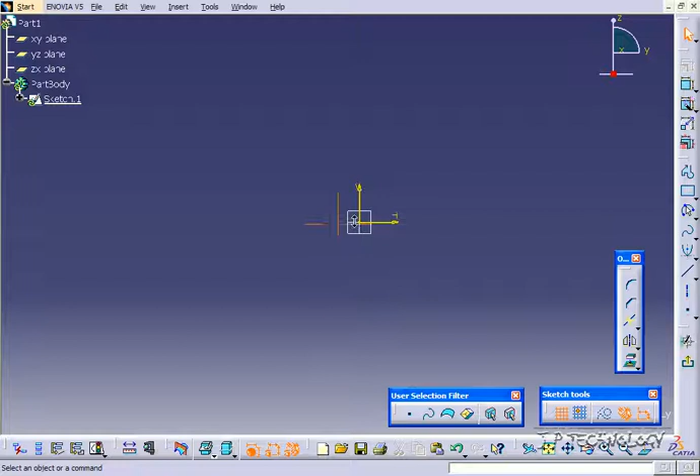So in the last tutorial, I showed you the definition of the Spline sketch feature. So now that you kind of have an understanding of what a spline is actually doing mathematically, now I'm going to show you how to manipulate it within CATIA v5. To find the spline tool, it's Insert, Profile, Spline, and you can choose the spline, or it's on the toolbar on the side right here.

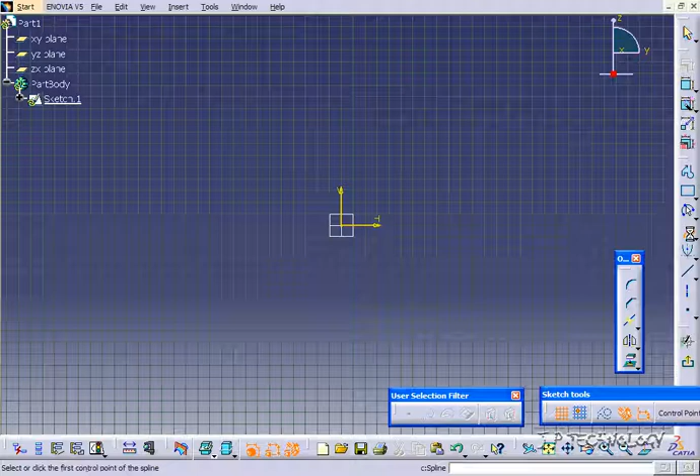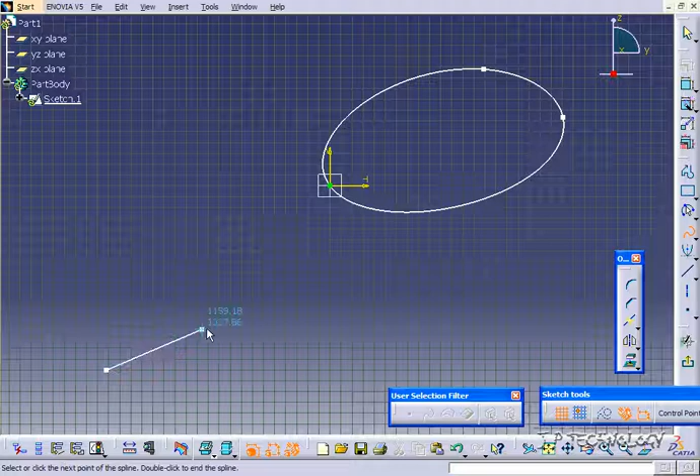So let's click Spline, and let's just start drawing one out. Now, in CATIA, say I've drawn this spline, and now I want to close it. All you have to do is right-click and click Close Spline, and it's going to close your spline profile. Now say you don't want to close the profile, what you have to do is start drawing it out, and then once you've got your profile done, double click Escape, and it'll leave your profile alone.

Now again, like the other sketches, you're able to manually adjust, so you can click on the spline and move it in any position, but say you actually want to change how it looks, you'd have to click a point, drag, and move it around. This is especially useful with the spline, because the spline has a very organic feel and look when you're playing with it.

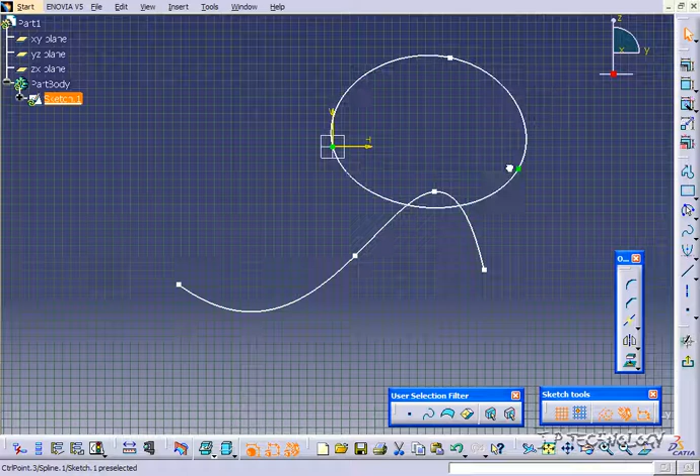It allows you to really massage your spline and give it the look that you want. So you're able to do it to just the profile, or you can do it to a complete sketch such as this. Now, before I showed you that the spline tool is very mathematical, and that each of these sections is a different function, you're also able to add dimensions and constraints.

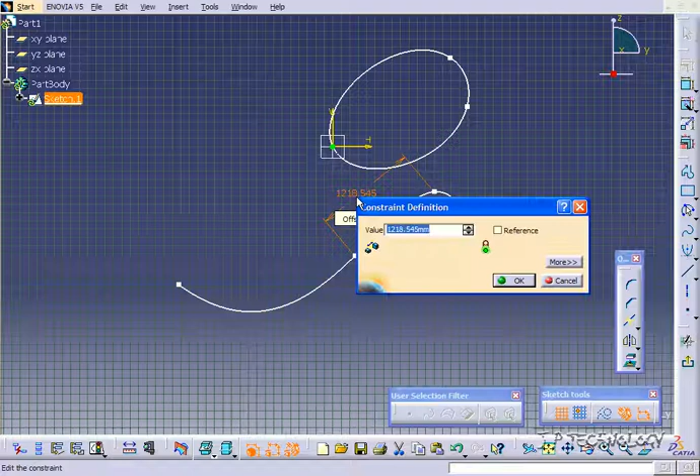So let's click Constrain, and let's click this point here and this point here, and we'll change the distances. So let's make this 2,000, or sorry, that was 200. Let's make it 2,000. And you can see that we can add dimensions and constrain where these points are relative to one another. So we'll make another one there, and we'll make these 1,000 apart.

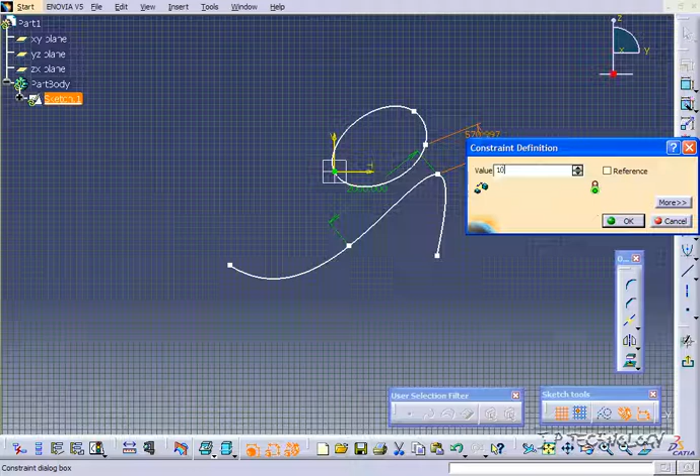So by adding these dimensions, you're actually able to really hone in and develop your spline, either if you have a mathematical model of what the spline should look like, or just to define these points. And that concludes our tutorial on how to use the Spline sketch tool within CATIA v5.